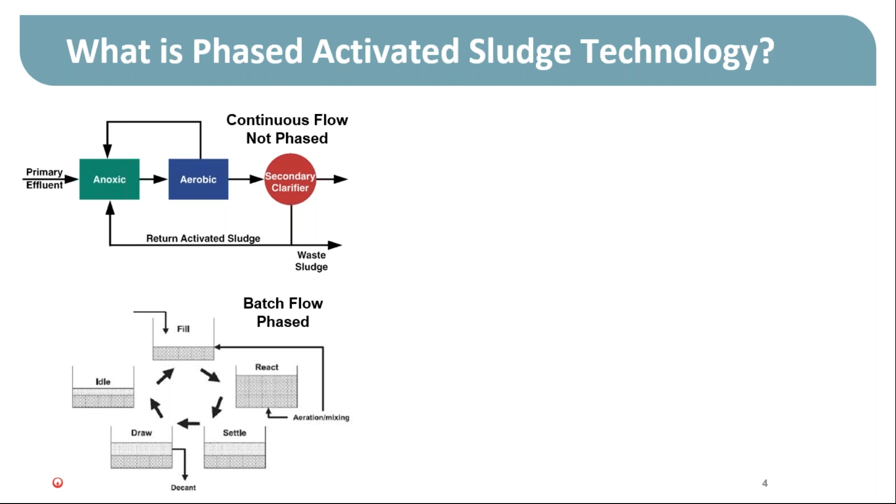And that batch flow may be just the effluent, or it may be the influent and effluent. There are many SBR systems that take continuous influent and intermittently discharge, and then there are batch systems that take intermittent influent and intermittently discharge. But they all do have settling and decanting in the reactors, and thus are discharging flow on an intermittent basis. So they're batch flow from that standpoint.

So when we look at what we're referring to when we're talking about phased activated sludge technology, in some ways we're somewhere in between these two types of conventional systems. A phased activated sludge technology, as we define it, is a continuous flow technology, continuous influent, continuous effluent. It's using conventional secondary clarifiers to achieve our solids liquid separation. But we are phasing within the reactors themselves. There are not separate dedicated anoxic zones, anaerobic zones.

And so we are walking through aerobic steps and anoxic steps to achieve the nitrification and denitrification we achieve within the system. And we are also controlling how the flow proceeds through. So we're in essence phasing the flow, although it is continuous across the whole system. We're phasing flow between series and parallel type operations or isolation type operations.

The phases that you see here, phase B, E, G, J, those are some general typical phases used in this type of control strategy. There are numerous intermittent phases. You can imagine any combination of where the flow is coming in and which reactor flow is leaving, and whether a reactor is in an aerobic state or an anoxic state. And there's a phase that lines up with that combination.

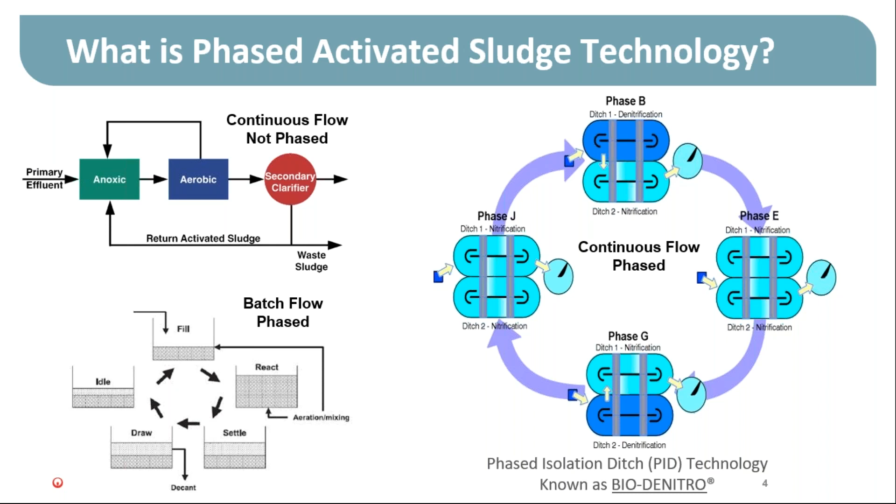So another way that we refer to this continuous flow phased technology is phase isolation ditch technology. From our company, that has utilized the trade name of BIO-DENITRO for many years. The technology has been out there and known as phase isolation ditch technology. As you can see, that schematic shows oxidation ditches, which is how this has typically been applied in the past.

And when we look at how we physically set that up to achieve the functions that we're trying to achieve, we usually would see some form of distributor at the front. This may be a simple distribution box with an automated gate that controls which reactor the flow goes to. It could be weirs on the front end of each of the reactors. And then there are weirs on the effluent side of each reactor to control whether that reactor is discharging flow or not. And then there is a connection in between those reactors for flow to pass between them.

And that's what allows, when we lower the weir in one reactor, raise the weir in the first reactor, and bring flow into that reactor, we're creating a hydraulic gradient to send flow from one reactor to the other one and out. And so we can manipulate very simply the influent flow control device and the effluent flow control devices to send flow through those reactors in any direction that we want.

We can isolate a reactor and only treat for a period of time, and isolate a reactor and settle for a period of time if need be in certain storm flow type situations if we want to inventory some sludge in a reactor. So it imparts a great deal of flexibility in how the flow is processed through the system.

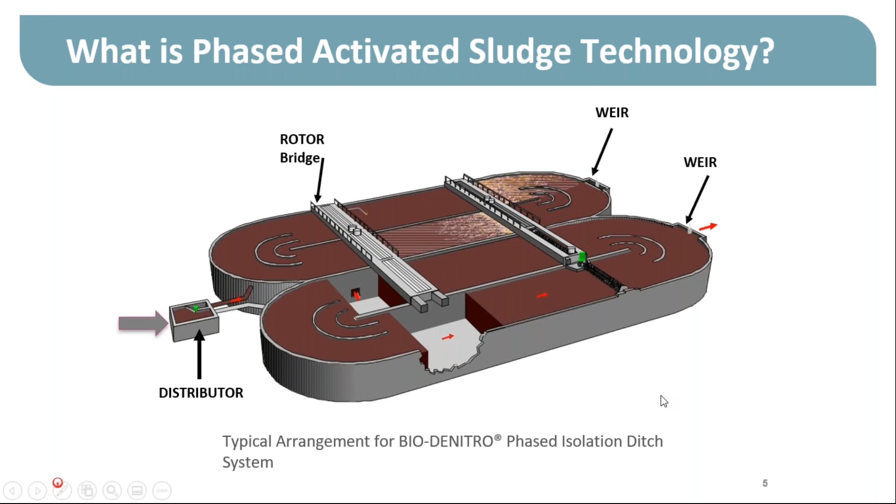So some of the common characteristics of these types of systems, the phased isolation technology systems, are the phasing between aerobic and anoxic conditions, the phasing between series, parallel, and isolation operation. They all tend to operate in the extended aeration mode of treatment with hydraulic retention time usually in the 18 to 24-hour range, and an SRT of 12 to 20 days.

One of the real key characteristics that makes this very advantageous technology is the ability to do TN removal to low levels without internal recycle. So there is an energy benefit to not utilizing pumping to move nitrified flow around the system. The manipulation of the flow path and the environment within each reactor allows us to achieve that, similar to how an SBR goes through its cycles and does not require any sort of recycle of nitrates back to any different reactor. Again, they do use conventional clarifiers.

There are offshoots of this type of technology that do function on more of a continuous SBR type basis that we have done, usually for very, very small plants. But predominantly this technology utilizes conventional secondary clarifiers, which is good from the standpoint that they are easily designed. They're known out there in the industry and in the consulting community. They have integrated and optimized sludge withdrawal mechanisms, optimized skimming devices. So that's a very known commodity to work with the system.

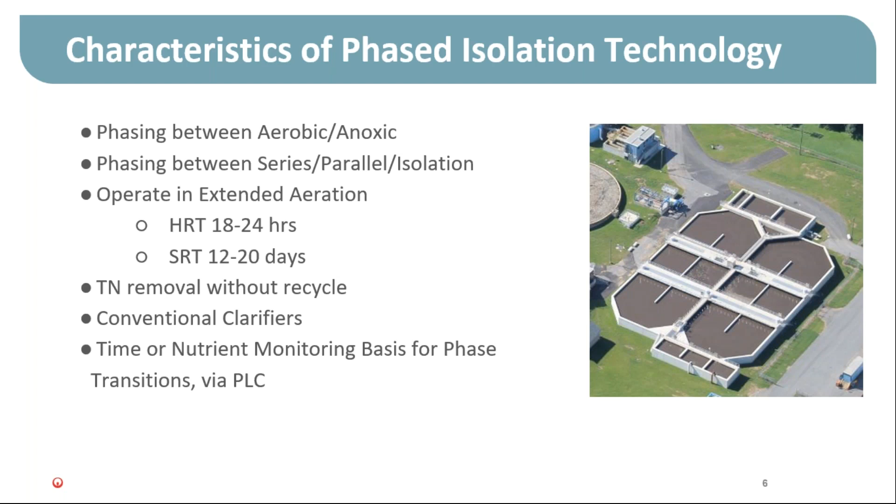Sometimes systems do utilize secondary anoxic zones with this technology. That is very dependent on the specific wastewater makeup and the effluent total nitrogen target. We certainly have cases, and Liberal is one of those. Liberal, Kansas has a fairly low BOD to TKN ratio in the influent. There really isn't enough carbon present to support denitrification down to the levels that we'd like to achieve. So that facility, as you'll see, does have secondary anoxic zones designed into it with the ability to add some supplemental carbon.

And then through biological phosphorus removal alone with a BIO-DENIPHO, 1 milligram per liter total phosphorus is generally what we would design for. Certainly lower levels are achievable with chemical addition, particularly if filtration is used. The picture here shows a 12 MGD BIO-DENITRO facility in Cary, North Carolina, their north plant. And I just wanted to show a little bit of cost information; I'll make reference to this later as well. Around $3 per gallon, and that's the cost for just the main secondary treatment, not the complete plant. That was from an upgrade that they did, adding the third train.

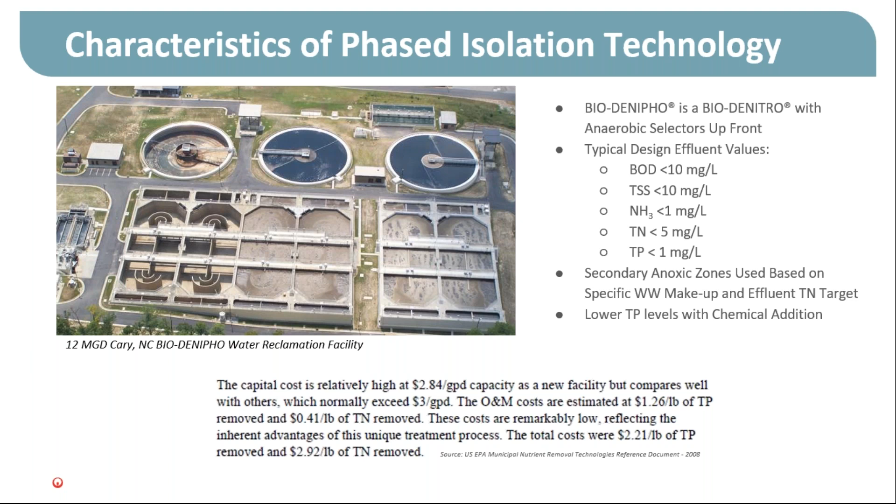And what's really telling about this, and this is from the US EPA Municipal Nutrient Removal Technologies reference document, is the very low cost of total phosphorus and total nitrogen removal that's achievable with a system that doesn't incorporate the recycle, that has very flexible, finely controlled phasing within the system. So just wanted to note that, and we'll make reference to that later.

So with that, I'm going to hand it over to Pete, and Pete's going to tell you a little bit about the Liberal, Kansas project. Thanks, Mark. The Liberal treatment plant, the current one, actually handles both city municipal waste as well as the National Beef packing plant, which is a beef packing plant that's right next door.

The Liberal plant was built in 1985 and basically no longer could meet the effluent requirements. They currently discharge about 9 miles through a gravity pipeline to the Cimarron River. So we had to meet the KDHE regulations for water discharging into a stream. New regulations set up by KDHE had new permit limits for lower TKN and brought in phosphorus. These limits were set to 10 and 1, which required the existing plant to be looking at what to do, how to correct these or get the limits down.

One of the main concerns was the NBP plant being tied into it. NBP has phosphorus coming out of their lagoons at 25 milligrams per liter, and ammonia is over 120 milligrams per liter. So the first thing we looked at was to try to find a way to work both plants together to make one plant, basically, and trying to come up with a way to retrofit the existing system. The retrofit we got with Veolia and looking at an MBR plant, and then we got looking into how to retrofit this existing plant to make it work.

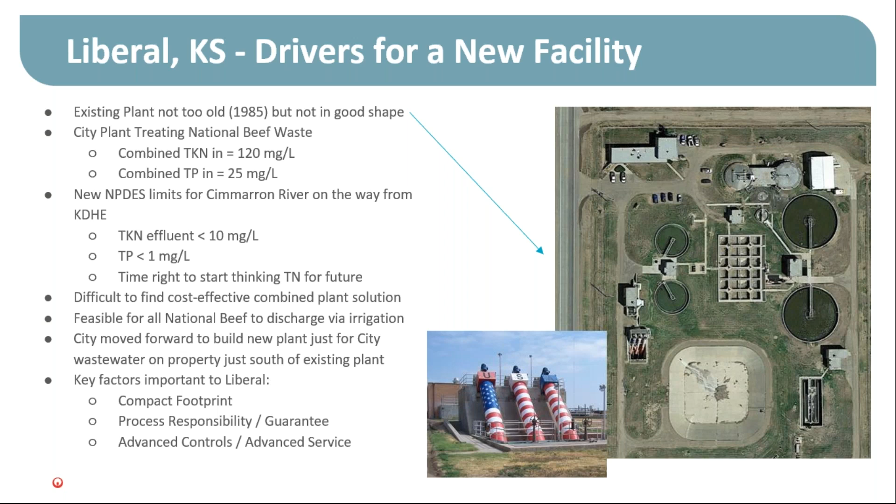So they looked around at a lot of different options. They visited a lot of different treatment plants. And again, they decided to be with Veolia. The BIO-DENITRO process fit the bill of what they wanted. It gave them the technology they wanted, gave them the Bio-P process being part of the basin, along with the trains, as well as the aerated sludge basins, all in one unit, as you see on the drawing there. Through negotiations with Veolia, Veolia supplied the BIO-DENITRO system, blowers, and the tertiary filtration system.

The other part of the system was, of course, the controls. They wanted everything automated. They wanted everything on computers and smartphones. Currently, they have an entire wall that is the current control system from the 1985 plant. So we got back with Veolia because they were the ones that were supplying the main process as well as the other items. And so Veolia got together and designed the SCADA system for the city.

Working with the city, we also put in a new administration building, which is that T-shaped building to the top. Obviously, new headworks, clarifiers. We have a centrifuge as well as a tertiary filtration system. As you stated, at various times the city's BOD coming in is low. We have chemical addition as possibilities, or adding MicroC if needed, as well as phosphorus removal if needed through the tertiary filtration.

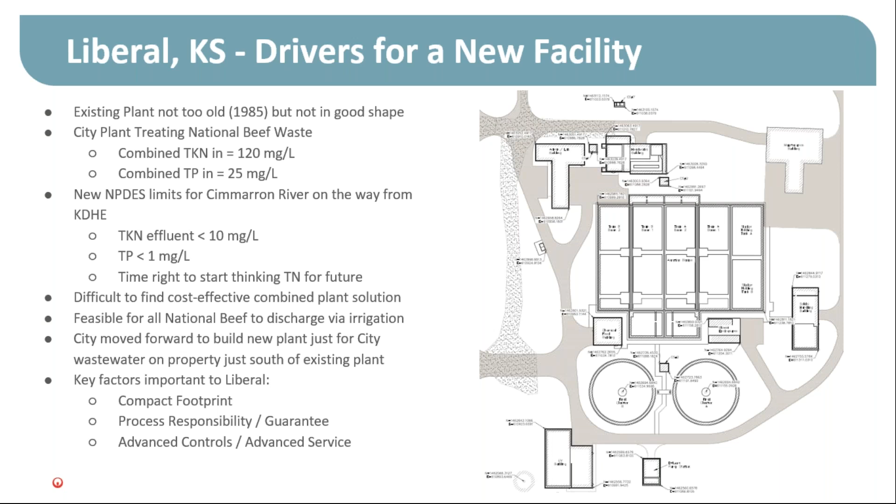All right, thank you, Pete. So just a little bit more information about the Liberal design in some of the upcoming tables. And also, I just wanted to draw notice to the fact that before, when we talked about the phased isolation technology and the history with that technology, we have predominantly supplied that in oxidation ditch type reactors. When we approached the design for Liberal, Kansas, we did not approach that with oxidation ditches.

It's with deeper rectangular tanks with a simple double-sided diversion gate and central channel. You can see that in this rendering. Construction isn't complete, so I don't have a full picture of the completed facility. But this allows us to flow through this channel either way, from one reactor to the other. So they are flowing, in essence, in series from end to end when we're flowing in series.

And it is a solution that will allow us to meet the full functionality of the BIO-DENITRO process, obtain all the benefits of the very efficient nitrification and denitrification in the system, and do so with two very simply actuated gate devices. That ultimately leads to a simplified and less expensive construction than doing oxidation ditches and a much smaller footprint.

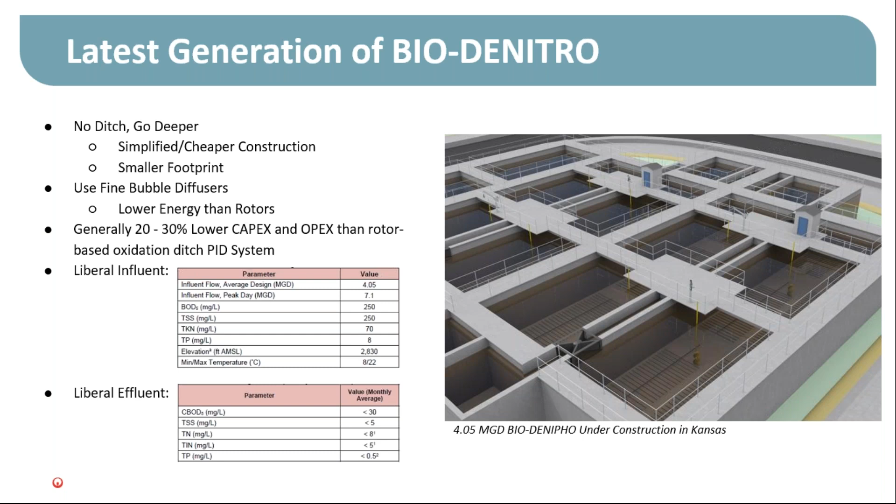The effluent we're designed for reaches further than what the current KDHE permit limits are for the surface water discharge, with the total phosphorus down at 1/2 part and total inorganic nitrogen of less than 5 milligrams per liter and total nitrogen less than 8. I'm not going to go through all these individual numbers. You can look back at the presentation afterwards if you want to dissect any of that.

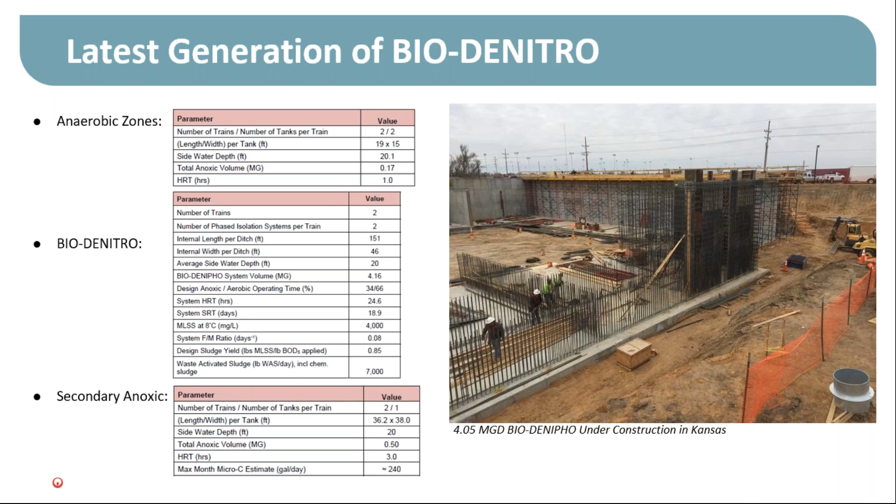But again, here you can see in the main reactor itself, pretty conventional in terms of HRT, SRT, and you can see there that design, and this would be at the full loaded design conditions, design anoxic aerobic time, about 34% anoxic, 66% aerobic on average. That, of course, is variable, and as we step into the more advanced controls of the facility, that is really the main parameter that is adjusted in real time as the phases are controlled based on a variety of inputs to keep it optimized at all times.

So with that, I am going to move into that discussion on the controls. The Liberal plant will utilize the AQUAVISTA Plant's digital model predictive control-based system. So just a brief summary of what that system is. It is advanced optimization for collection systems and water reclamation facilities. We've employed it as a holistic solution that integrates complete plants and all of the unit operations at the facility and/or collection systems, or down to just the secondary process. So it's fairly flexible in the scope and size that it can be applied with.

It is model predictive control. There are algorithms that have been developed and fine-tuned over many years and utilized in treatment facilities and collection systems that incorporate both hydraulic and process models and economic models to drive the optimization of the system. So there's various inputs, from real-time sensors at the plant to weather data to energy price information, that can all go into the system and feed the optimization.

We've applied it in municipal plants and industrial plants, and it's not only applicable to Veolia technologies. We apply it to a variety of different technologies, and I would say the most predominant would be a conventional activated sludge plant. There are certainly more of those out there than anything else, and we've utilized AQUAVISTA Plant advanced controls in many of those kinds of facilities.

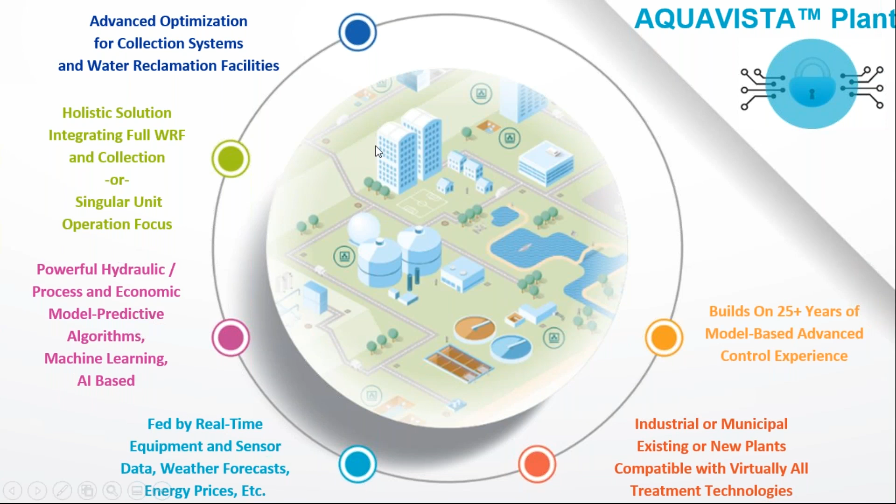And then finally, it builds on over 25 years of experience with advanced controls. Our team, predominantly over in Denmark, has been perfecting the algorithms that are used for, again, over 25 years. They really pioneered this use and continue to promote it today.

AQUAVISTA Plant is process control from the cloud. All of the algorithms that are running and the generation of the model, that is all happening in cloud-based servers. So we're pulling information from PLCs at the plant. There's an OPC bridge, firewall protections, etc. The highest level of security that you could employ is employed with the system to ensure the plant's network and the plant's equipment are protected.

But we're pulling the necessary data that needs to feed into the algorithms, utilizing that information and generating new set points. And those set points then go back through the OPC bridge and are implemented automatically in the PLC or PLCs, depending on the overall scope at the plant.

We traditionally, with this arrangement, will set up on-off controls in the plant SCADA, and we'll certainly do that for Liberal, Kansas, where the operators always have control, and at any given time, a particular feature of the system can be turned on or off by the operations staff through their SCADA system.

But then in addition to that, there is its own user interface that has all the tuning settings for the algorithms, and you can certainly turn things on and off, and there is its own trending and viewing the models and viewing various key performance indicators, all housed within the AQUAVISTA Plant user interface.

So just a quick look at the structure of a typical algorithm. There isn't anything new or novel in terms of this aspect. And to be clear, I am not a data scientist and I am not a coder. I am a process person and product manager now. But many people at Veolia are data scientists and coders, and they have worked and developed these for many years.

So we have various online instruments. We have external information like weather forecast information, weather radar, energy price information. That all is filtered through a set of data quality checks. As we all know, the algorithms that run, the outputs that they generate, they're only as good as the data that feeds into it.

So there's a very robust data quality checking system that will be able to identify when there is data coming in that doesn't make sense, and that data will be filtered out and not used, or some form of action automatically taken. And we'll see a little bit more on that in just a second. But all that data feeds in, goes through the data quality check.

The various models that the different modules utilize are built, they're updated. That model predictive piece of it, and then the raw data that's come in, all that goes through a pre-processing step. And then there are the algorithms that are running the control logic, and there are different ways that it does that, depending on the type of module and the type of control in place.

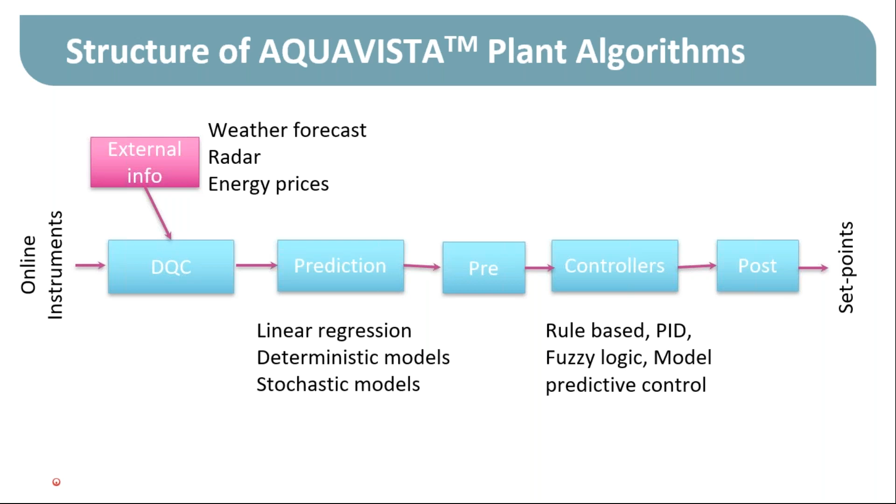So those types of advanced model predictive control algorithms can be applied in all kinds of different areas in a wastewater treatment plant and in a collection system. For the Liberal, Kansas project, the focus there is on the secondary treatment, and it's on utilizing the DO and nitrogen control module and some of the other secondary treatment modules to ensure that that process is very well optimized

at all times. As we developed this project with Earls Engineering, one of the key concerns was this new technology and the ability of the operations staff to optimize it on their own. And the one thing that I think many of us have seen and felt throughout our industry is the frequent turnover of staff, the learning curve in place as some of our experts who have been running plants for a long time are retiring and newer people are coming in. Having a more robust, more automatically optimized facility makes those transitions easier that we're seeing in our operations staff today.

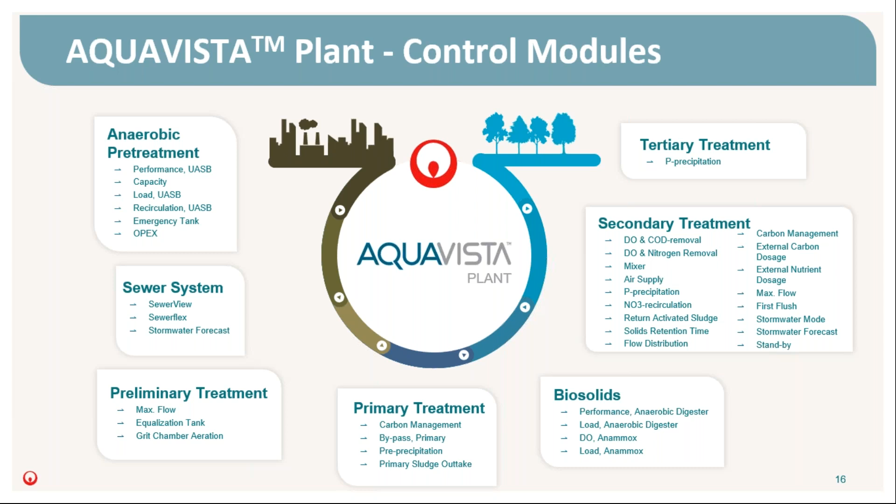I wanted to do a very quick example of NDN phase control. The important takeaway with this is that it is a multi-criteria control. We're utilizing flow, ammonia, and nitrate and DO as inputs to the algorithm. And the basic strategy is we want more nitrification time, more aerobic time when loads are higher, and more denitrification time when they're low, so that we're not over aerating.

The benefits are maximizing the nitrate removal, maximizing the nitrate that's used for BOD removal, improving the nitrogen removal, and getting the highest energy efficiency possible in the system. This is just some photos showing some actual information, some data that's come out of the system. That first one, again, we're building that model. We're utilizing that in our control of the plant.

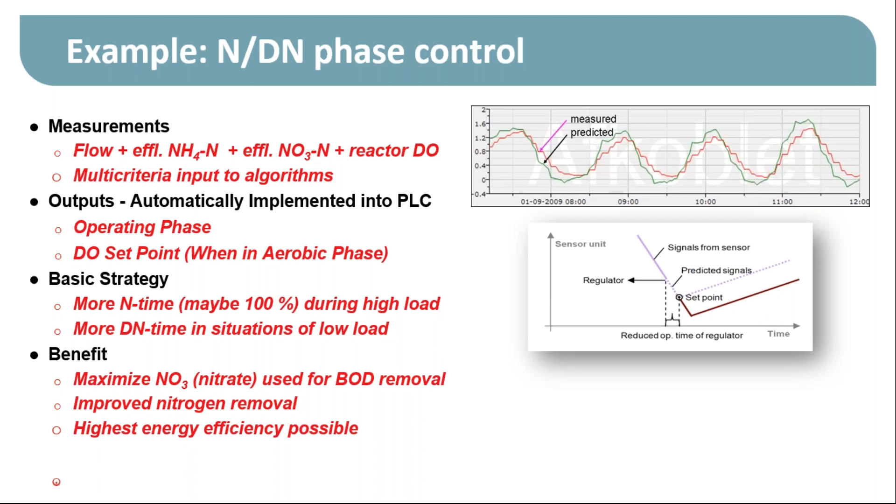This also enables us, it's a very routine setup in all of the control modules that we are making adjustments, factoring in lag time. Again, every time you call for a change in a plant, it takes some time before the effects are felt, and through our historical model that's built, we know how things are going to behave. I should say the control system knows how it's going to behave, and it can compensate for that to keep things more fine-tuned and automated.

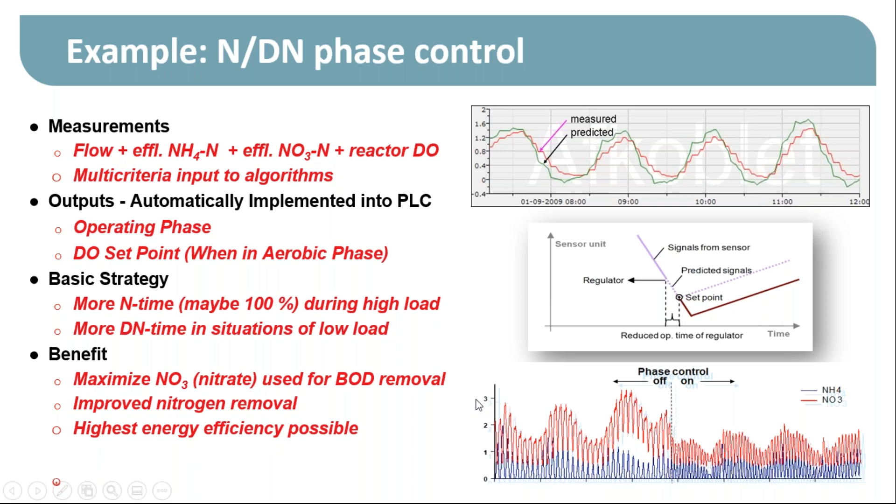This just shows an example, and this is in a plant that was utilizing the technology back in around 2009. So we've refined it quite a bit since then. But this just shows a plant that's even doing incredibly well at removing ammonia and nitrate, with average levels less than 1 on ammonia in the effluent and right around 2 on nitrate. Once we implement the DO and nitrogen control module, it gets even tighter, even better control. So you can imagine how well that does for a facility that's not already treating that well, and moving down there.

I mentioned the automatic data quality checks. I just wanted to come back to that topic real quick because this is important in any facility that's utilizing this type of automated control that is implementing new set points. When we have data that is not usable, not able to be used in the algorithms, and if it would generate set points that are potentially going to lead the system astray, it won't use that data.

And there are many different fallback positions that the system automatically uses once data goes away. It doesn't immediately go, okay, well, we're not going to control the system now and everything just goes offline. It's going to use the next best, the next best, the next best. It's always going to optimize it as good as it can with the information available to it that is good information.

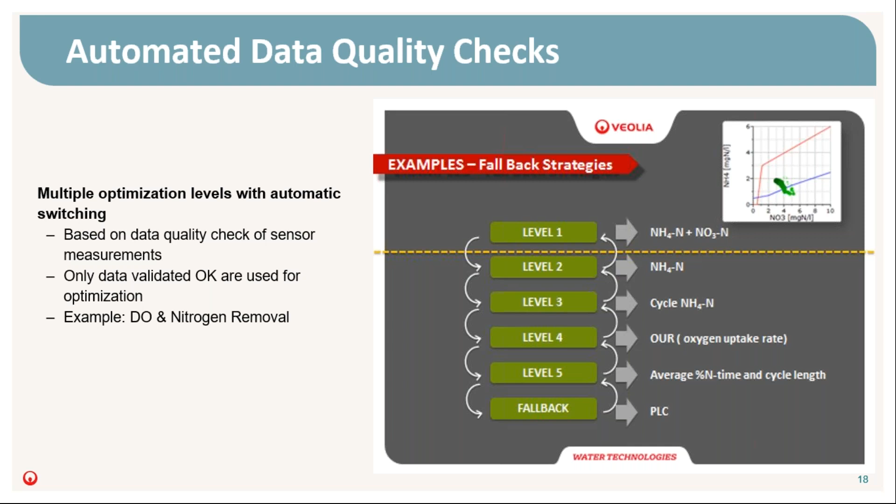So at the end of the day, when we implement this type of model predictive control, the results that we've seen in treatment facilities, and this includes very large facilities like the largest plant in Warsaw, Poland, that treats the wastewater from 2 million people, to smaller 10,000 population equivalent plants: very significant energy savings, chemical dosage savings, better gas production from digesters, and most importantly, lower effluent concentrations and more stable systems.

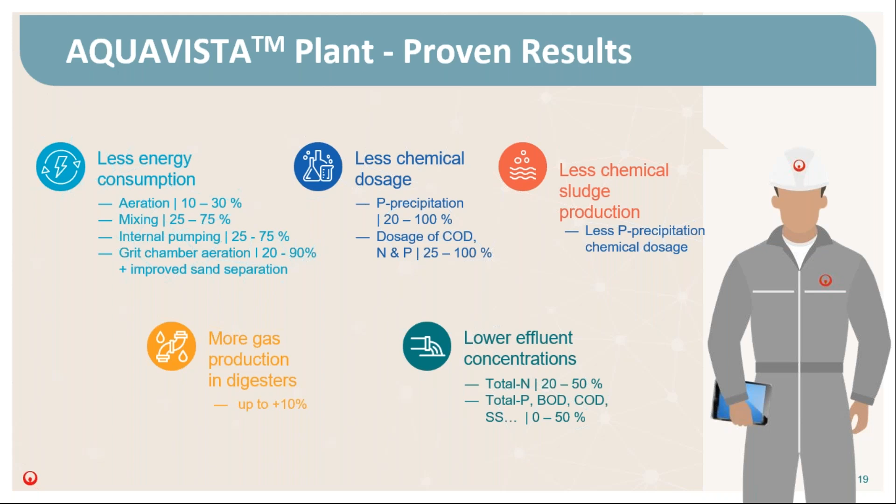We also see gains in capacity in treatment systems where this model predictive control is implemented, the ability to get higher BOD and ammonia loads through, and sometimes avoid additional reactor construction. And the same on the hydraulic side. We certainly have examples of large facilities that have avoided building additional secondary clarifiers, or have significantly reduced the size of clarifiers used in their design by some of the strategies that have been implemented with this model predictive control.

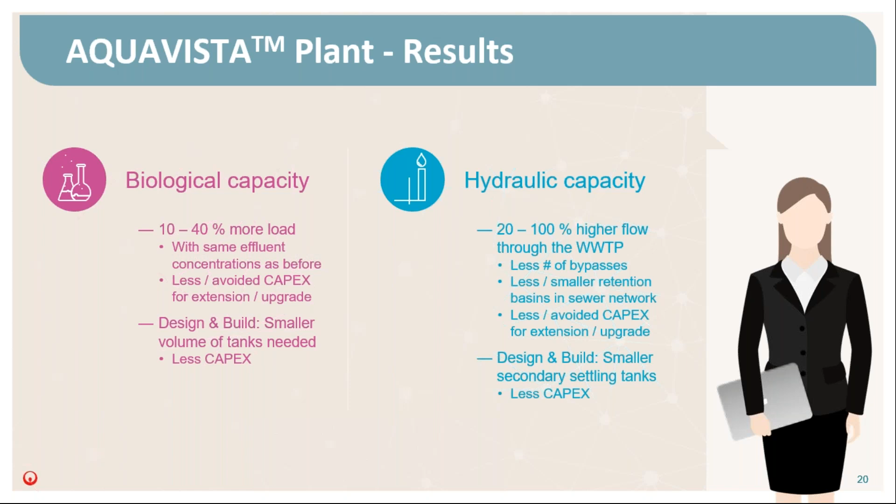Last thing to mention on that, one really neat feature with the AQUAVISTA Plant, we do utilize what we call AQUAVISTA Lab, and that is a user development platform where the facilities that implement that solution have the ability to design new control algorithms themselves, working in conjunction with us ideally. But it's sort of a playground where if there is not a control module that is already ready to go,

if a plant sees a need, they can move in the direction of doing it themselves and come up with their own control algorithms, build their own models in real time within the AQUAVISTA platform, and test out their control algorithms on their own in that virtual environment before anything is ever implemented. It's a pretty neat, powerful tool to enable facilities to really expand what this type of control system can do.